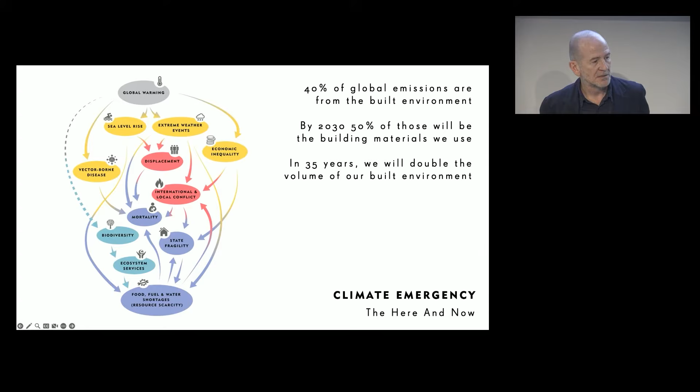And so for us, this is not a Christmas card, by the way. So for us, this is something that we've always really been quite loud and proud about. You know, so we go on marches, we talk about climate change, we engage when we sit down with our clients, when we make competition entries. This is something that we talk about. This is something that we are not embarrassed about.

It's part of the theory of change, that you have to change the conversation, that you have to immediately engage, be loud about these things. This isn't something that we should be kind of quiet about. It's not a way in which we should be approaching this subject. And we know the rules. You know, it's about building less. It's about building light. It's about changing the way in which we see success in architecture. It's about changing the way in which we frame success.

So it's not about the tallest building or about the wackiest shape or the most esoteric kind of argument and position in architecture. It's actually about an architecture that makes a difference, an architecture that is part of that change and begins to think about its position in society and as a profession and as a subject and as a practice. And for us, that really works in our practice as three pillars.

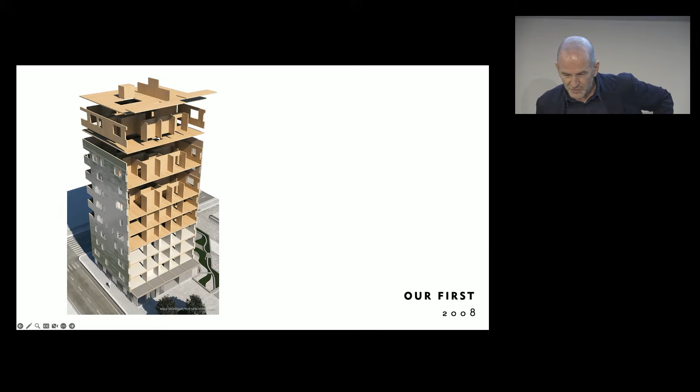And then the more that we understood about this material, the more we understood that this could be a viable replacement for concrete and steel, that this could be something that we could think about in terms of urban housing that could replace these incredibly polluting practices. And so in 2008, after a few years of trying, we built our first tall timber building, which is Murray Grove, 9 stories.

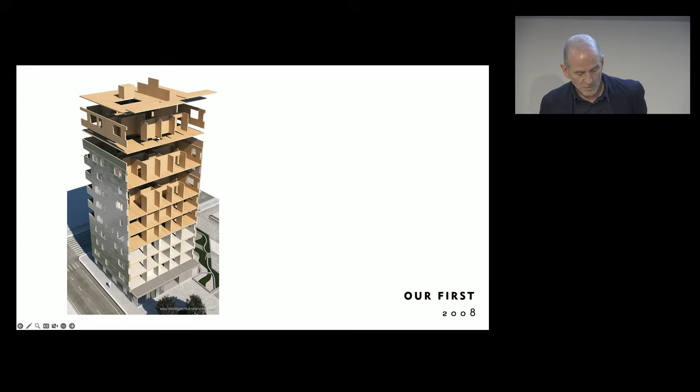I walk past it every Saturday morning on the way to my daughter's swimming lessons, so I can vouch for the fact that it's still there personally. And it's 29 apartments. It took 4 people 27 days to build. It saves over 1,000 tons of carbon dioxide from building, stored within the timber itself.

So I'll get on to talk about trees a little bit more, but as we all know, as a tree grows, as a tree flourishes, it soaks up carbon dioxide from the atmosphere. It releases oxygen back into the atmosphere for us all to breathe and stores that carbon within the trunk of the tree. So a typical European spruce will be just over half carbon, solid carbon. So they are a solid carbon store. So we take these trees and we put them in our buildings.

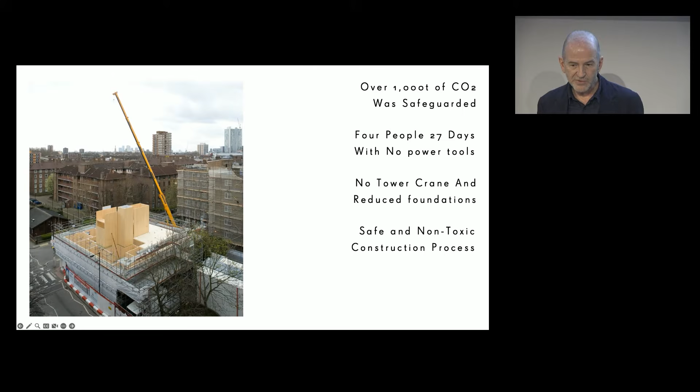We plant more trees in the place of the trees that we cut down, and then these trees become carbon stores. So this was the idea behind this practice. Not only is it a carbon store, but it's a low carbon form of construction. It's a lightweight material, one that you can prefabricate incredibly accurately, so plus or minus just a couple of millimeters when you put it up.

This first tall building, at the time there was really only just a standard type of CLT, 5-ply CLT like this, and we put the building together with 75 mil shelf brackets and 100 mil screws. And you can see it's very simple the way it went together, almost like a cardboard model. It's probably got about twice as much timber in it as it needs to have, is the truth of it. But at the time, nobody had done a building this tall, and so we threw caution at the process.

But also we learned lots of other things. When you change the material that you build in, lots of other unforeseen things change as well. I remember vividly the electrician walking around the project on stilts, so that they can fasten the electrics up into the ceiling. He told me that when you're an apprentice electrician in the UK, you spend about the first 18 months of your apprenticeship hammer drilling into concrete. And after about 18 months, your shoulder joint disintegrates, and then they teach you about electrics.

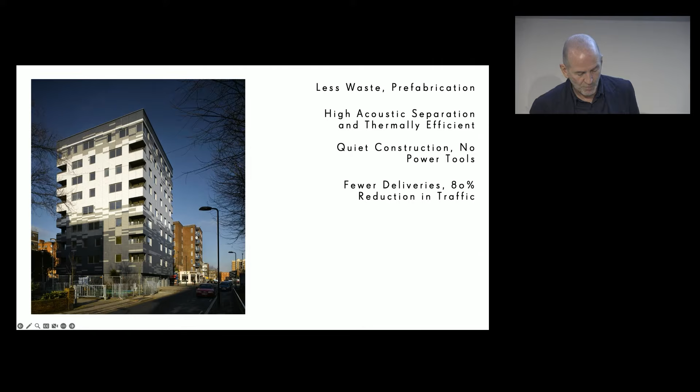They finished the job in half the time that they were programmed to do, because they walked around with their stilts and cordless screwdrivers. The whole thing was finished so fast. So as I said, 27 days, 4 people built the building. Very, very quiet construction, because no hammers, no grinders, no cement mixers, no toxic dust anywhere. Maybe 1 or 2 splinters and a cordless screwdriver. So incredibly fast, incredibly quiet, very little waste.

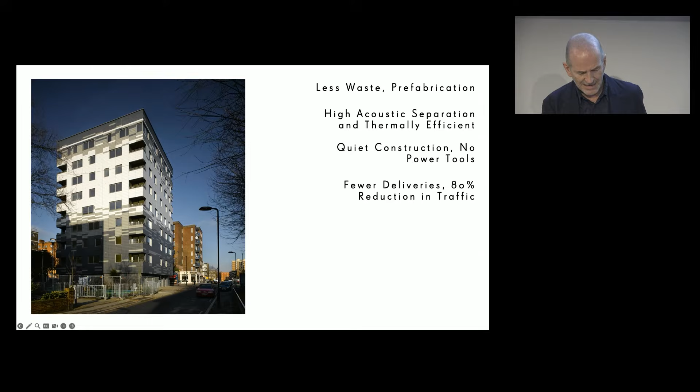And when you think in London that about 60% of our waste that we send to landfill is from construction, the idea that we sent no waste from this building to landfill because of its accuracy is incredible. And far fewer deliveries as well, so none of these big trucks thundering through the streets of London carrying construction components, because it's all prefabricated and lightweight.

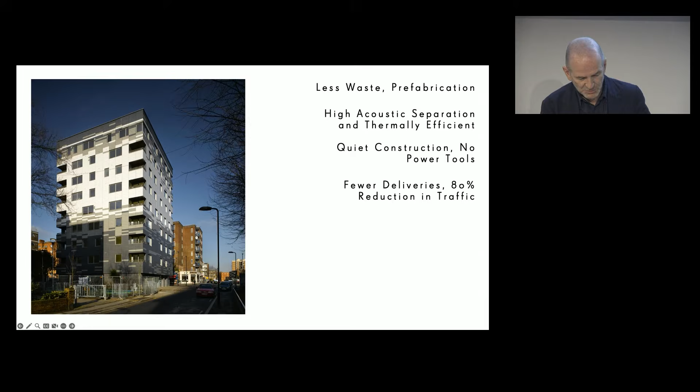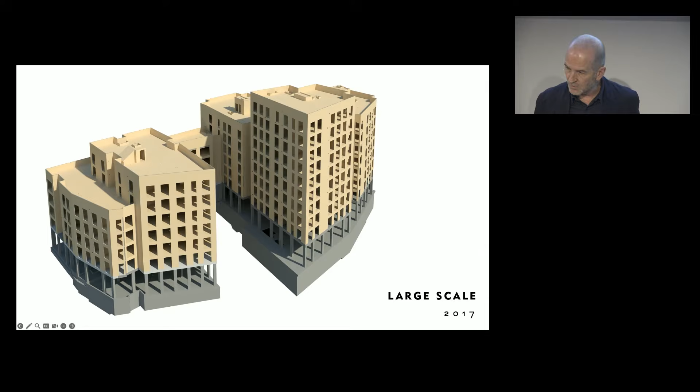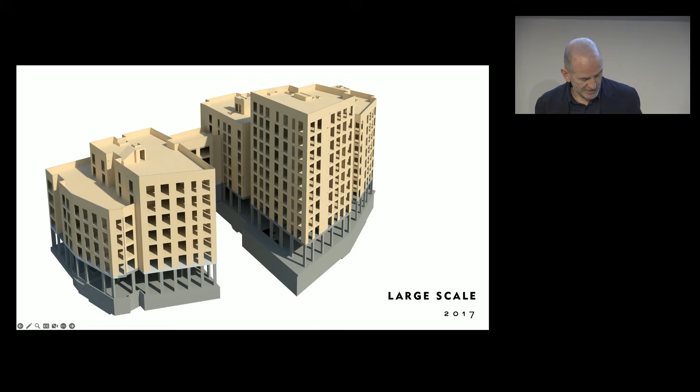Following that building, we built a number of other fairly small projects. This one in 2017 was a larger scale one. It's about 22,000 square meters, 125 apartments, and 4,000 square meters of commercial. A big building for us, 10 stories tall. And you can see here, completely clad in brick, holding these balconies.

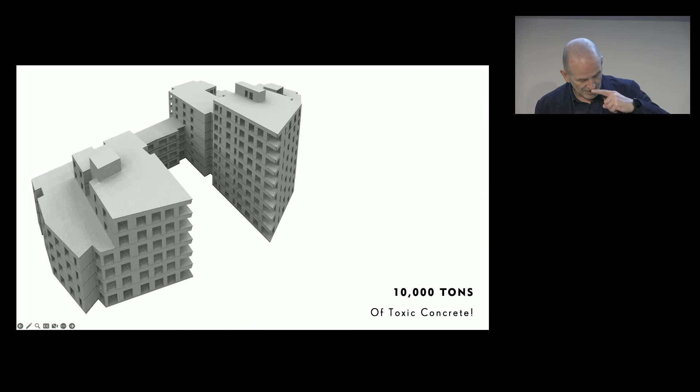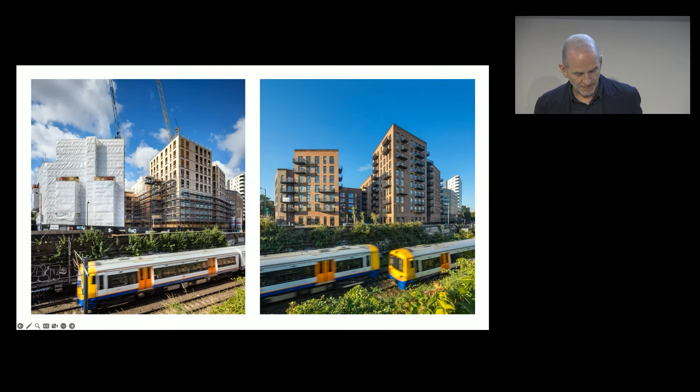In concrete, it would have weighed 10,000 tons. There would have been over 1,000 concrete trucks coming to site, one after another, month upon month. And yet in timber it was less than 2,000 tons. And we built the entire structure in 5 months. In fact, you can see how fast it was, because by the time the train's gone past, the building's finished.

And we don't only build in timber, we also look to other low carbon materials, other bio-based materials. This is a project that we did in 2017 as well, which is a cemetery for the Jewish Orthodox community in North London. And this cemetery is made completely from rammed earth.

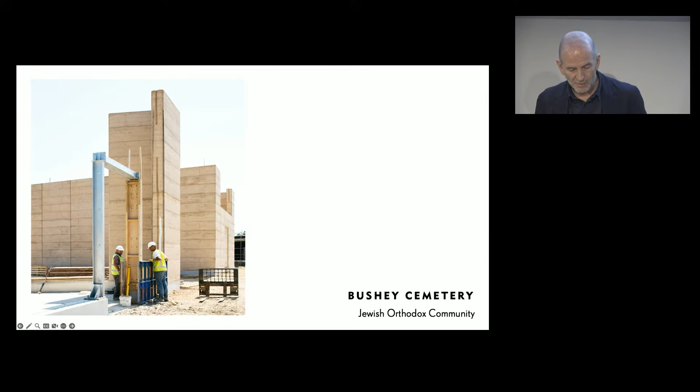Part of the whole Jewish burial process is very much engaged with the soil of the site. When you lay a coffin in the ground, the relatives or loved ones of the person who's deceased will actually pick up soil in their hands or with a spade and lay soil back on top of the coffin. So the idea that we produced a set of buildings which came from the soil around them was seen to be an incredibly fitting way of doing it.

When I first went to the site, you saw that the site falls about 8 meters from one side to another, which, when it was planted with cabbages, was absolutely not a problem at all. But as soon as you have the potential of filling the whole site with dead bodies, then that water runoff becomes a lot more important.

And so we had to move a lot of the soil from one side of the site in order to help flatten the site. And I just had this picture of this soil being trucked out, truck after truck after truck of soil. And then the idea from that emerged that we could actually build these buildings from the soil

of the site. And so there was something about the idea that you're using a Middle Eastern technology with a British soil that seemed to be particularly fitting for this community, that this relationship through the process with the soil, with the earth as well, was incredibly important. And so you can see here that the buildings seem to almost emerge from the soil around them.

And then each one of the panels in the wall, each one of the casting panels here, they're all exactly the same. And the process for making each one of those is exactly the same. And yet each one of them is completely different.

And the idea that when you stand in a funeral hall, when you're at somebody's funeral, I think that most of us have at least two emotions. And one of them is obviously sorrow and loss, grief for the person that's departed, but also there's a feeling about our own mortality.

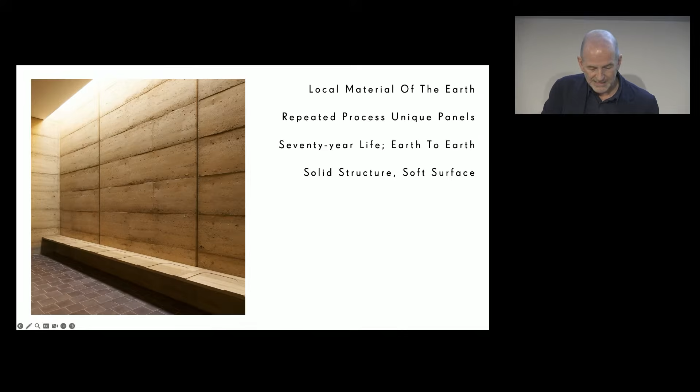So we applied the same idea to the floor, they're all encaustic tiles. We applied the same to the lighting, which is all hand-blown glass lights. And then the idea that you have this natural material throughout. So we have a timber ceiling, so you can see the timber in the soffit.

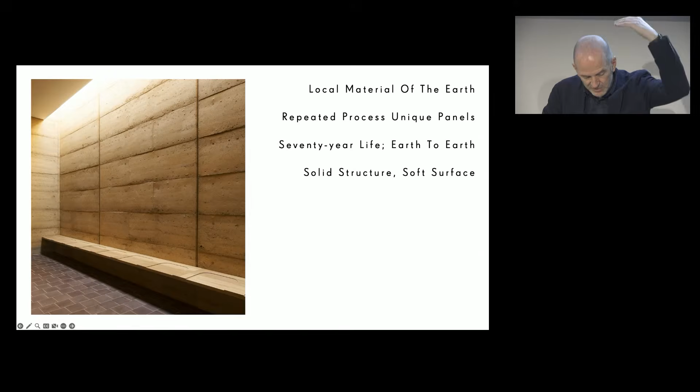We have timber benches that surround the area on the outside wall for the elderly to sit on. So that you get that feeling of material, of warmth, of difference, of patina throughout the building. You can see that now. There is what it looks like now.

And so in 2018, we did this project with Vitsoe, who are a shelving manufacturer. This is in Leamington Spa, in the Midlands. And the brief for this factory was really challenging. I don't know if you're familiar, this is a shelving system designed by Dieter Rams.

And the idea of the shelving is that it's a component system. You have two parallel rails, and within those rails you can fit different components. So shelves, cupboards, drawers, and you can take them away when you move house. You can reconfigure that shelving as your life changes.

And so the idea is that this is a sustainable, long-lasting, repairable, replaceable, reusable piece of furniture that you live with. And the idea was that this building would have some of those properties, that that character would be taken through to the construction.

And so we designed with Vitsoe this frame system that you can see on the left-hand side of the image, and that frame is made from LVL. So rather than the CLT, the cross-laminated timber that we were working with on previous projects, which is made from softwood, this is LVL, which is made from a veneer, like plywood.

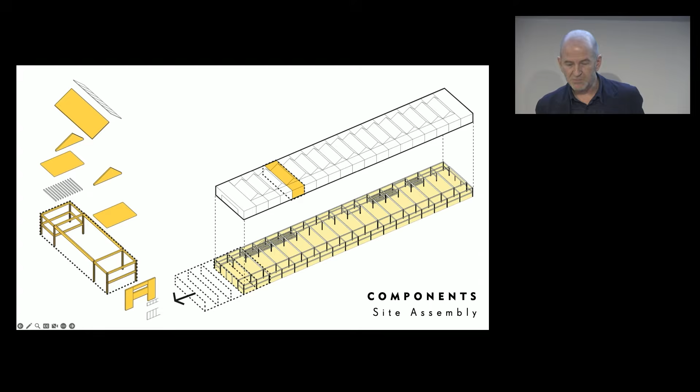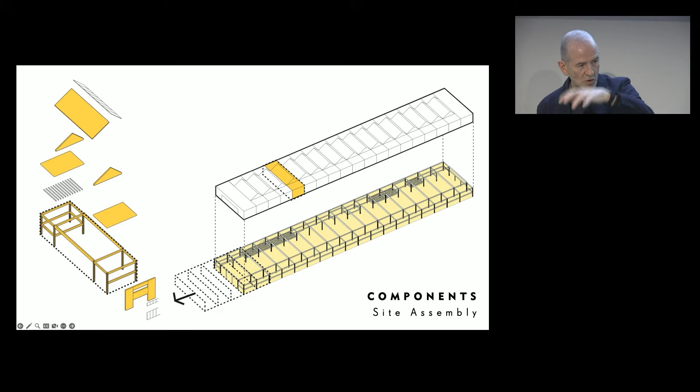And this is made from hardwood, beech, which is the second most farmed tree in Europe, previously planted for furniture and now not used that much for furniture. And so this is a product from that, which is incredibly hard, incredibly tough under compression, about 2.5 times stronger than concrete under compression. So a very strong material that can span long distances as well.

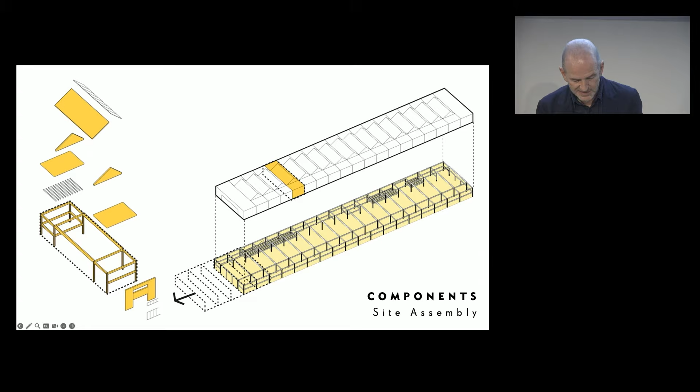So this frame is held in place by the outside wall, by the CLT that surrounds the building. So we have this exoskeleton, if you like, this hard shell that surrounds this frame and holds it up.

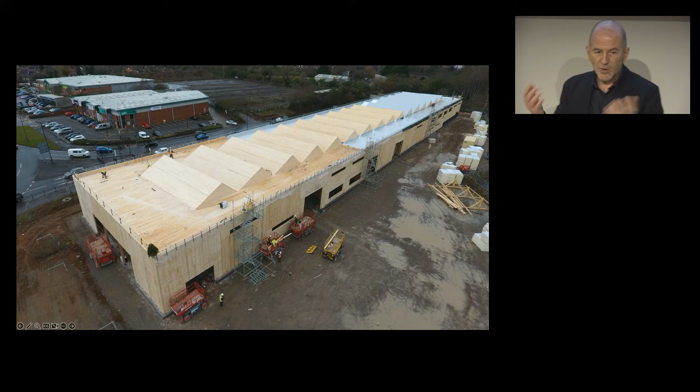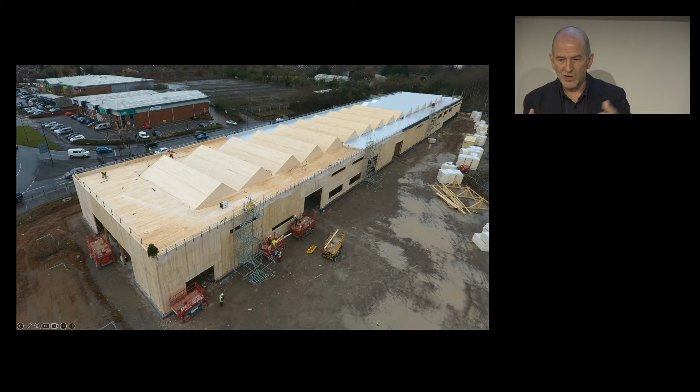So when you design in concrete, a concrete building is all about holding a heavy thing up in the air. And a timber building is really very different, because a timber structure weighs about 20% of a concrete structure.

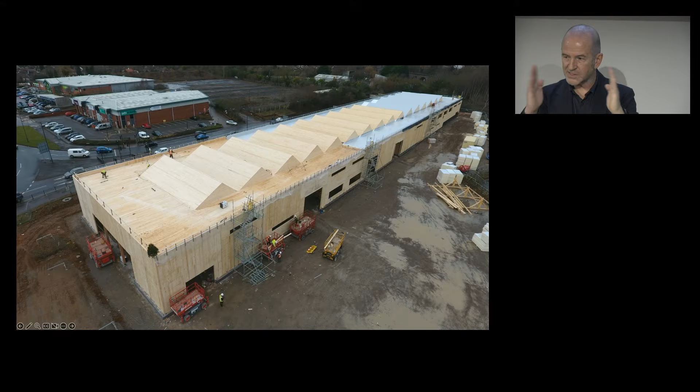So when you're designing a timber structure, you're not thinking so much about how you hold it up in the air, but more about the lateral forces against it. So what we did with this lightweight frame is then we braced that with this external shell. And you can see the light coming in from the north light windows there. You can see inside here the exposed timber in the building and the natural daylight coming through the windows, which just creates this incredibly rich and beautiful space.

And I think from this building, not only was there this understanding or evolution of this notion of the component-based system of design, but also an understanding that natural materials, that natural light coming into a building produce a very different type of architecture, a very different type of space.

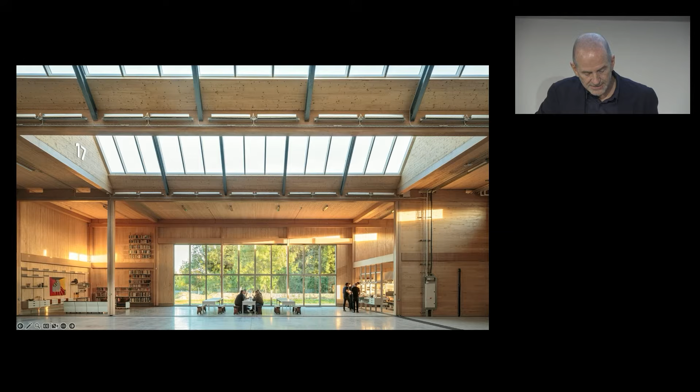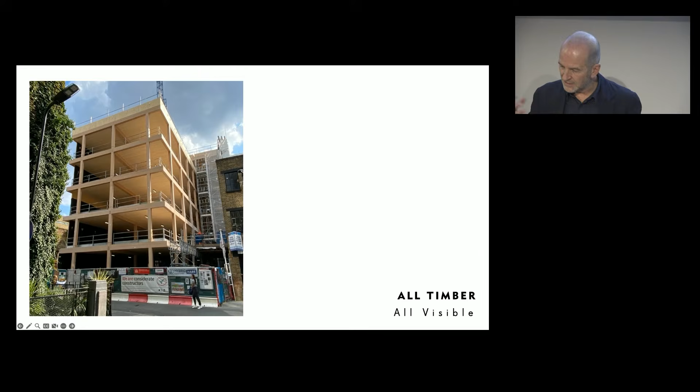And we took those ideas and really employed those in this building, the Black and White Building in Shoreditch, which is an office building which we completed in 2022. It's an office building designed specifically for co-working, for The Office Group, so like a kind of WeWork, but much more beautiful. And the entire building from the ground floor slab up is made of timber. So timber beams and columns, timber floor slabs, walls, lift shafts, staircase, core, everything in the building made of timber, and all visible.

And it was a tough construction. We filled out the whole site, so we couldn't build really from either side. So the truck arrived on the pavement outside, and the crane at the back of the site lifted the pieces of timber onto the site. Each piece of timber arrived with a barcode on it, and we had a person on site with a barcode reader that would be read on the 3D model on an iPad and then put into place. And so a very fast, very efficient process.

In fact, the entire building, the length of the site has about a 15 millimeter tolerance, and across the site about 10 millimeters. So you're working with something incredibly accurate, incredibly precise, a measured, intentional process, which is so different from the kind of concrete plastic architecture that we were used to doing before.

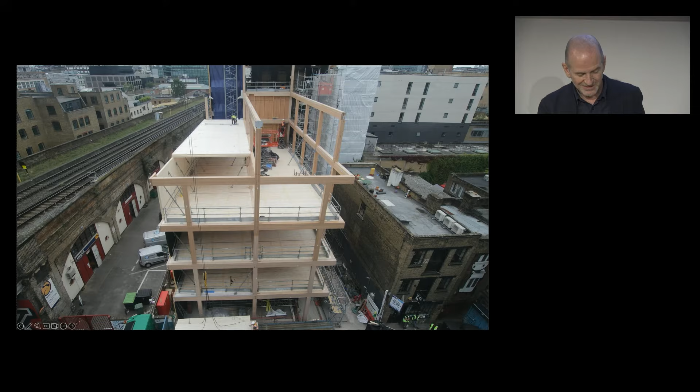So you can see, again, we've got this LVL frame, and we love LVL because it's so strong, it looks gorgeous as well. But also if you imagine when you take a tree trunk, when you cut square things from that tree trunk, you lose a lot of the tree. So you actually use probably about 60% of the tree. But when you have LVL, you put the trunk against a spiralizer, you spin the trunk really fast, and you get 90% of the tree coming out as a veneer. Then you chop the veneer up and stack it up, and that's your column. So there's a real kind of beauty to that as well, that we're really utilizing the material incredibly carefully.

And with this building, we took that same kind of idea of lateral bracing, but rather than having that hard external shell, instead of putting the floor slabs on top of the beams, we laid the floor slabs within the beams, so that the floor slabs themselves give the lateral bracing to the building. So by doing that, we were able to use much more simple connections. We were able to build a building far lighter and with less timber. So we used about 25% less timber by doing that.

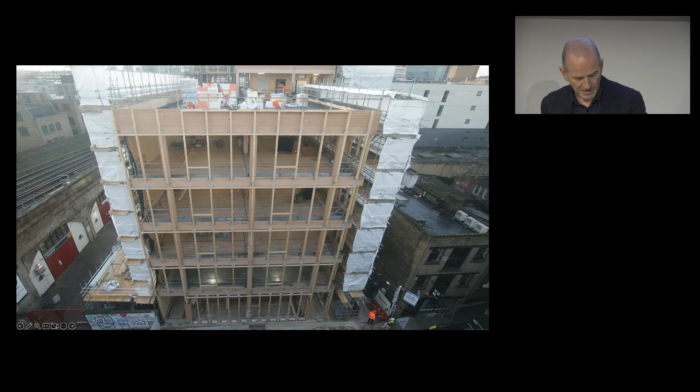As you can see, the building going up here, and then this is the external curtain walling going on, again in timber and glulam. And so on site, we were on site above ground for 14 weeks, 6 people on site, 893 pieces of timber, each one carefully catalogued and put into place.

And before we started the project, we sat down with the site managers, with all the people that hadn't worked in timber before, and talked about why we wanted to build this building like this, why we wanted to build it out of timber, what the differences were. And the kind of conversation that we started in those first meetings went all the way through our time on site. And the enthusiasm, the precision, the care and attention that was put on the site by those contractors, by the people building that building, was incredible.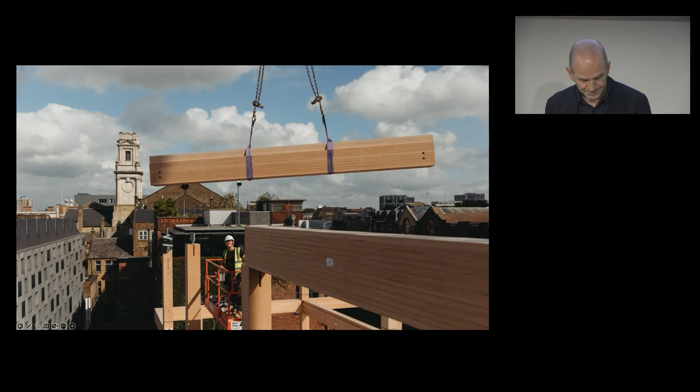So you can see here one of the beams going in with the indentation at the top where the floor slab sits in. And so you can see again with the plan, where the core is in the middle of the building, that the way in which this kind of lateral stability works is for all the floor slabs to track into the central core.

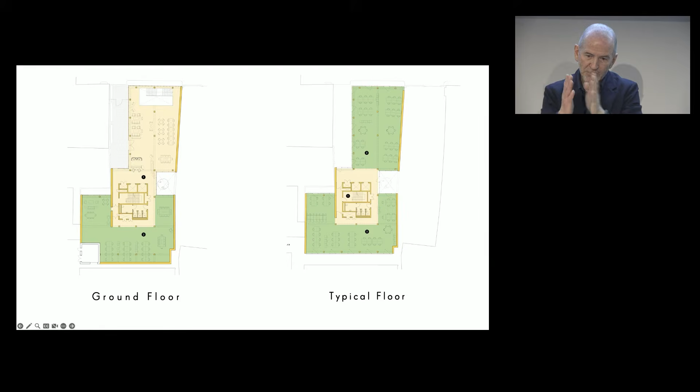That core rises through the building and provides that trunk-like stability through the building. So this is a building that was designed as a timber building. This is a building that was designed through components, through an understanding of what the capacity of the material was, what the advantages of the material are. And so it's designed for that.

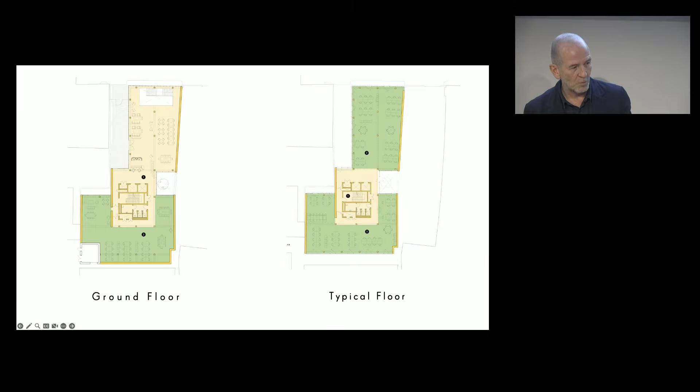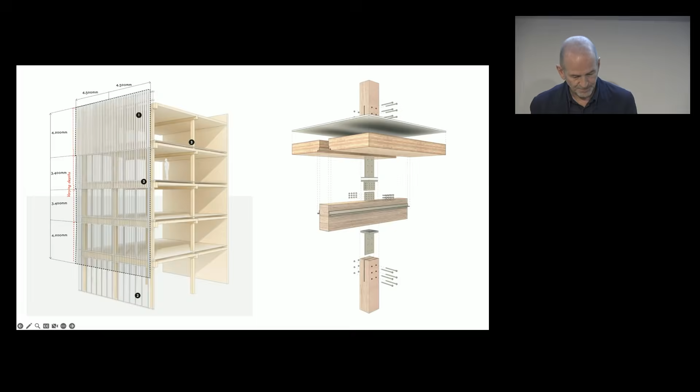So rather than conceiving of a form, which we see so often, I think, in contemporary architecture, and then working out how to build it, this building was conceived as components which we put together to contain a space, to create a space within it. And so here you can see this very simple diagram of how the building went together and how ultimately it could be taken apart.

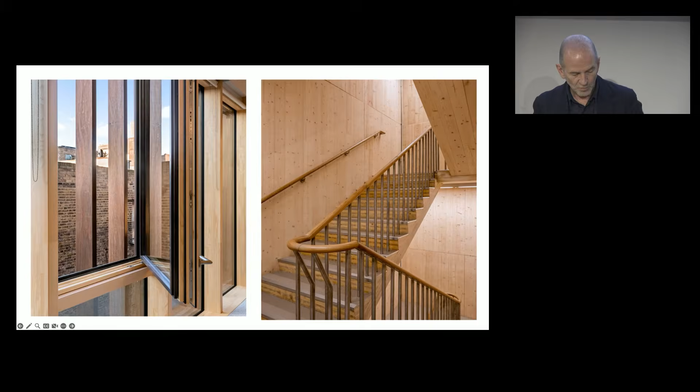And inside are lots of exposed timber, very calm, open spaces. We set the staircase down into the lower ground floor from the front of the building, so the building can sit directly onto the pavement and have that public presence or that civic presence onto the pavement without feeling an imposing force onto the pavement and onto the street. We have opening windows throughout the building, a timber staircase that people love thundering up and down. It's fantastic.

And so this building is a building really of a simple set of clear design principles. It's a building that celebrates its context, but also celebrates and talks about the people that use that building, the people that inhabit it. It's an understanding of the natural materials and how actually they benefit us. Thinking about the finishes of those buildings, thinking about the health, the sanity, the well-being of the people that are in that building. And that this is an architecture where we think really carefully about the design decisions that we make, both in terms of aesthetics, of architecture, of context, but also of material use, of carbon, and think really carefully about,

trying to, as professionals, make those judgments about the amount of material that we're using and what we're using it for. So this produces, I think, an architecture of sufficiency, an architecture where those materials, where that architecture is put together sufficient for its purpose, and part of that purpose being the well-being of the people that live there, that work there, but also the aesthetics and the beauty of that building. So simple finishes, reduced services, all of those things, incredibly important parts of the building.

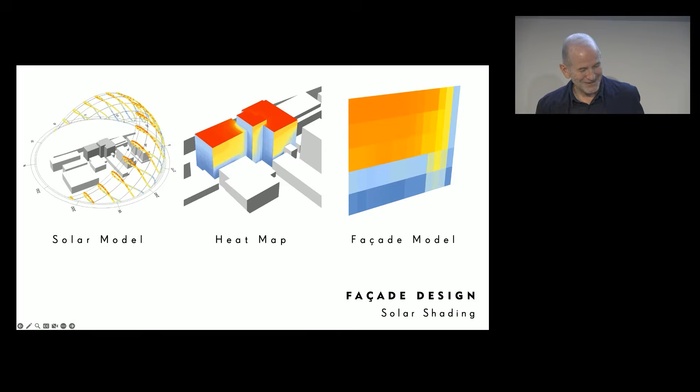And much like some of the work that I saw today, the SED, we also employ software to look at the building, to help us with the design of the building. So in terms of the facade design for this building, we put the 3D model within a solar model. Ladybug. Wasn't me, obviously. So we put it within that.

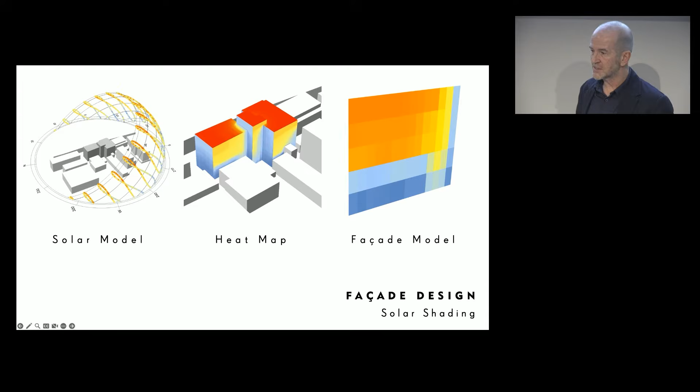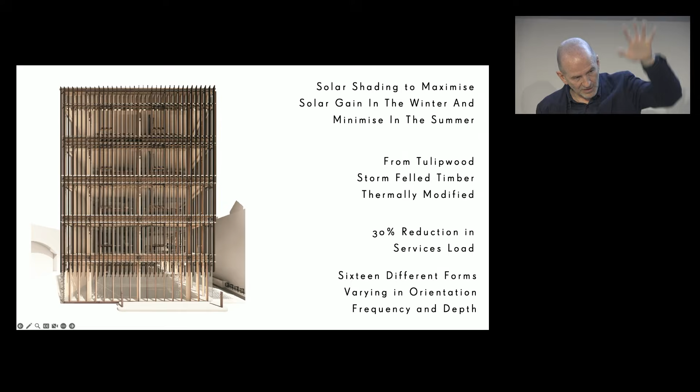We tracked the solar model across the facade to maximize the amount of solar gain in the winter and minimize the solar gain in the summer. And then across that heat map, we then put this solar shading across the building. So to the northwest, it runs vertically, and to the south, it runs horizontally. Across the building, we have 16 different intervals, depths, frequencies, and orientations of solar shading across the building.

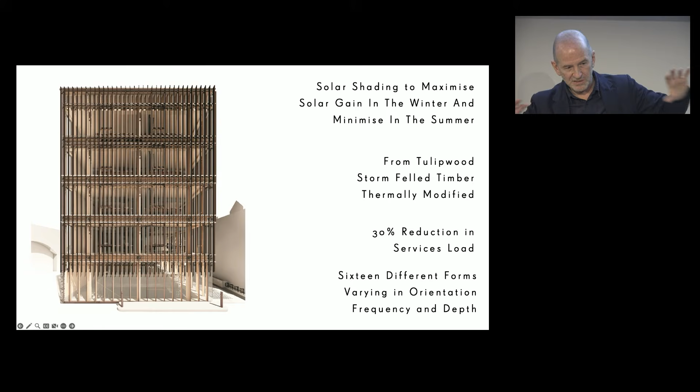And so not only is the orientation of that building mapped out on its facade, but also the adjacent buildings are ghosted onto the facade of the building, as you can see the solar shading changing across the building. And that allows us to have completely clear glass. So the glass on the outside of the building doesn't have any e-coatings baked onto it. It's not reflecting out UV.

It's allowing the full spectrum of daylight to come into the space so that people working in that space are working in a far more domestic feeling environment. You know, it feels much calmer. You're able to sit at the desk in that office space and know what time of year it is outside, understand what time of day it is, understand what the weather is like outside.

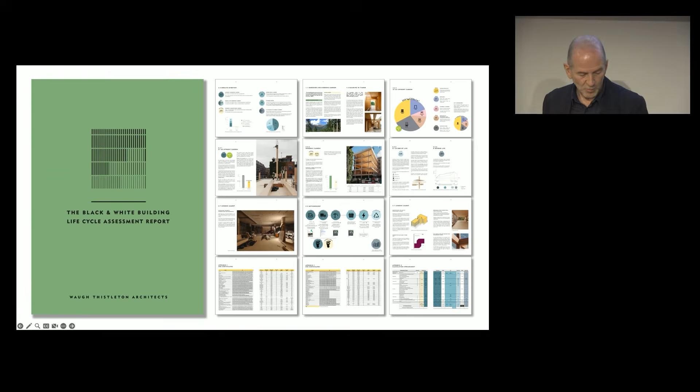And also, this is then glass that can be recycled. So unlike all the big glass office buildings that we see across London, where the glass of those buildings is covered in these e-coatings, which can then never be recycled. And so all of that glass we look at is landfill. And so part of our process on this job, part of the project, was also to assess the life cycle of all the different components of the building.

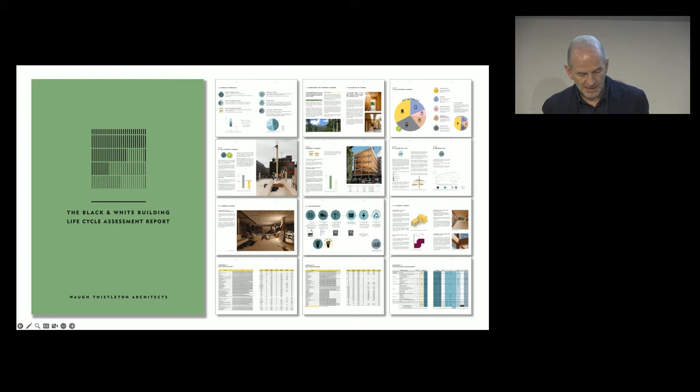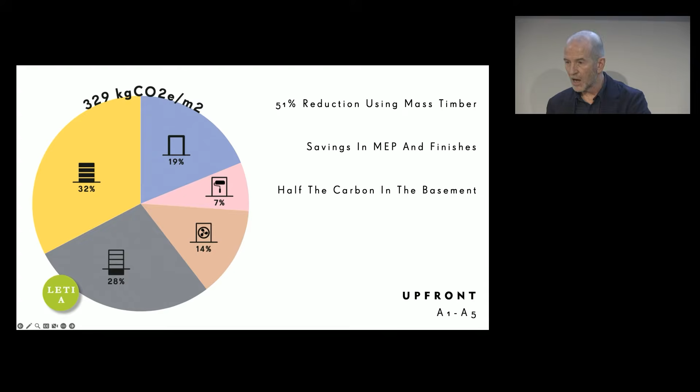So this is something we do as we design, but also something that we do when we finish the building, that we draw up. So this life cycle analysis of the building gives us all the figures and the graphs and the data that one would anticipate from an LCA, but also allows us to track our projections against the building in use.

And so we're able to take those 14,000 odd elements that put the building together, work out what the carbon burden of those was, work out how they perform operationally, and also to think about which ones will have a potential for reuse, how we can take that building to pieces in the future, reuse those components. But essentially, that's a building that has stopped.

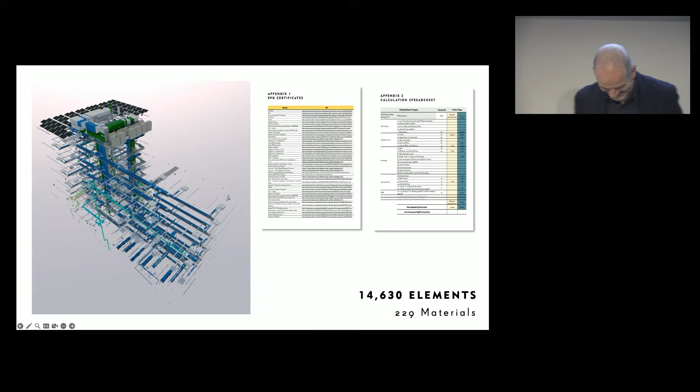Dan? You there, Dan? Oh, there you go. I don't need you.

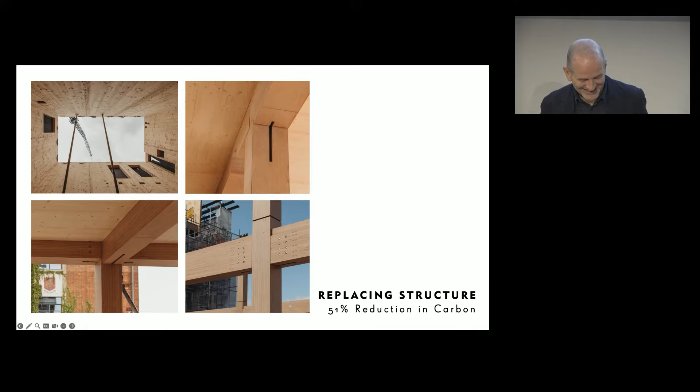But essentially, by replacing the concrete and steel with timber, we're able to reduce the carbon burden of construction in this building by more than half. And actually, a lot of that's just in the basement, the concrete in the basement. So the potential for doing this is massive.

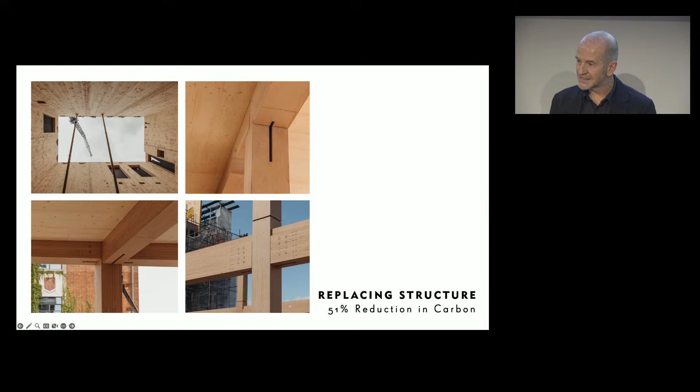If you think about the figures that we were talking about at the beginning of the talk in terms of the carbon burden of construction, the fact that we can halve this using existing technologies, existing know-how, we can immediately halve the carbon burden of construction and design.

So this building also is economically viable within the current context. So this is a building that has been commercially successful. It's fully let. It has a waiting list. It was 2/3 pre-let by the time it was finished. It was on budget. It cost the same as a concrete building, and it was on time and 4 months faster than a concrete building.

So these are the kind of metrics that we take into commercial clients, and we say to them, this is a viable alternative to the heavy carbon construction that you're engaged with at the moment. Now, we did used to do a lot of residential buildings, but post-Grenfell, because of the tragic events there and the understanding of the combustibility of this material, there's a lot of nervousness around building residential buildings in timber.

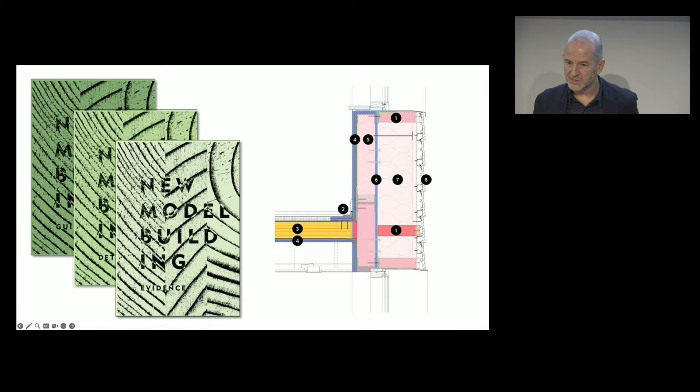So in 2020, we worked with the NHBC, with UK government, with GLA and others, University College London, on producing this series of booklets, a series of guides on how we can build safely within current building regulations in the UK in timber. And again, this was one of those things that started out as a technical exercise and yet turns into an understanding

of how, when you change a construction material, the process of construction, the process of procuring a building is completely different. And we sat down with contractors, with manufacturers, and worked out the process of building these buildings, worked out the way in which these buildings could be put together with ease and with speed.

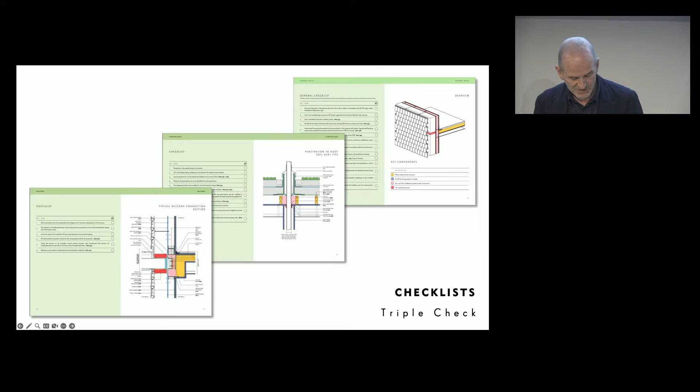And so if you follow us on Instagram, then you'll see these little GIFs that pop up every now and again. So each one of the 50 details that we produced for the building has a little GIF for the contractors to show them how the whole building goes together. And the idea was that these drawings became something that were fluent, that were understandable, that took their lead really from an IKEA catalogue or from a DIY handbook.

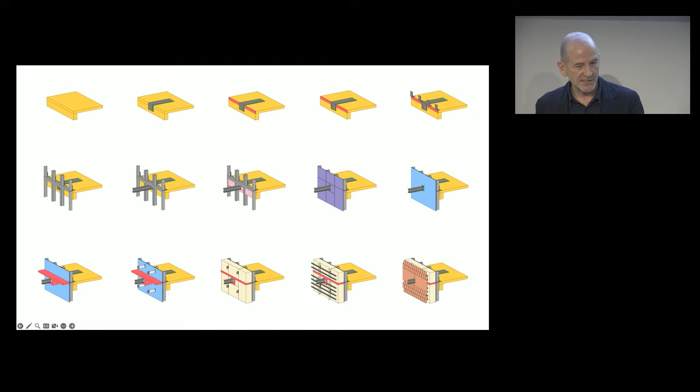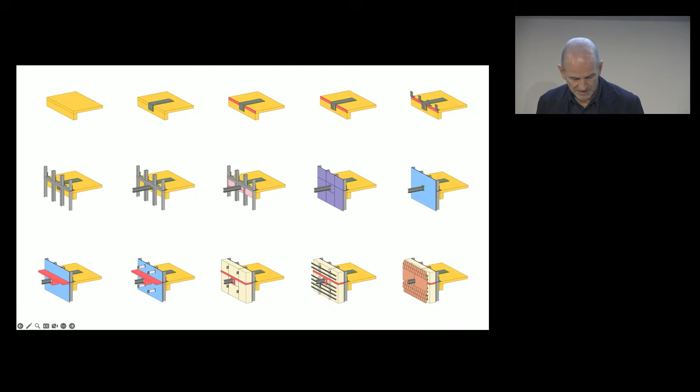These are drawings that are about the message of clarity and simplicity and communication. It's not a communication that's designed to be remote or to disenfranchise people from an understanding of how these buildings go together. And we do work with community organisations.

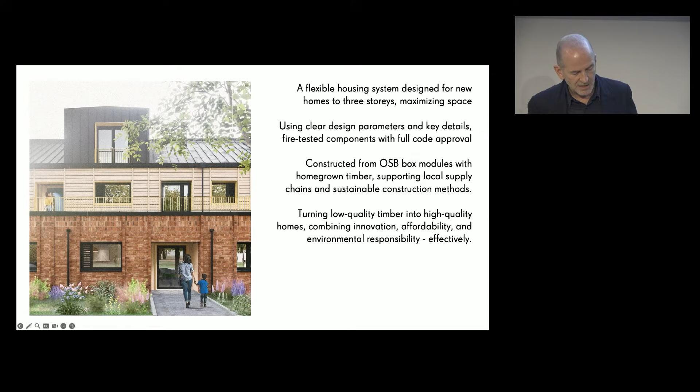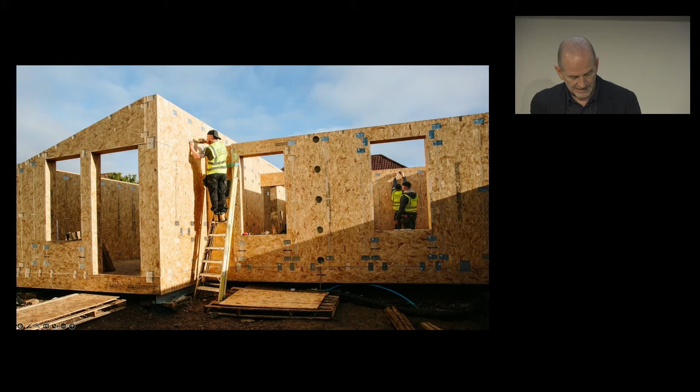This one in Bristol with Multimax, which is a community housing organisation, to look at a system for building low-carbon housing in Bristol, working with community and local council for a system for three-storey housing. And here's one already on site and being constructed both by contractors but also by the people that will live there. And this is typical of the research projects that we do.

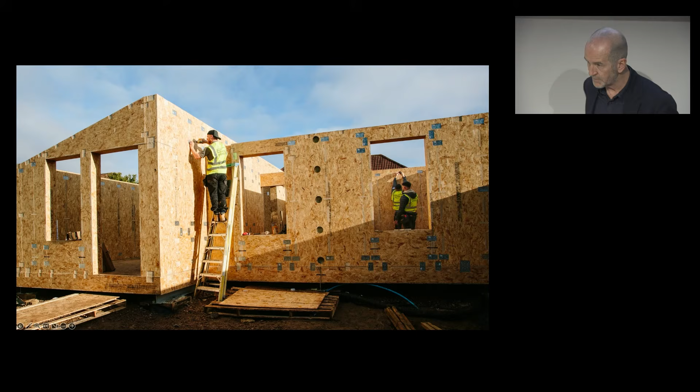We've done a few projects now for the European Union as part of the Horizon program. The one that I'm working on with the team at the moment particularly is the Timber House one, which is a really broad-reaching research project, thinking about timber from first principles. So thinking about this idea of a material that humanity, that all living creatures have lived in symbiosis with since the dawn of time.

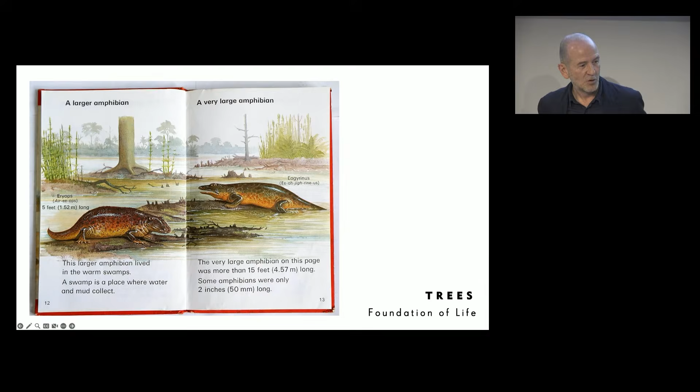This understanding that without trees, fish would never have crawled out of the ocean. We would not be living on this planet as human beings without trees. That this relationship that we have with the tree, with bio-based materials, is something that has been with us since the dawn of time. And so we talk about things like that.

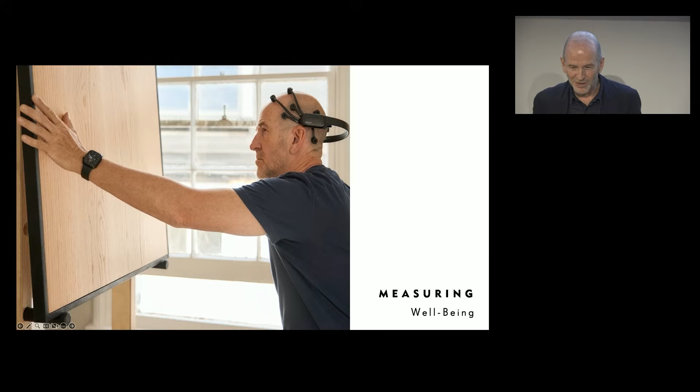We test ourselves. This is me looking at my brainwave patterns when I look at timber. And there you go. Look, hey presto, I really like timber.

Apparently. But it's also this relationship that we've had with natural materials, with natural light, with having plants, with having kind of nature in our buildings. This kind of move that modernism, the evolving modernism in the 1920s and 30s, this notion of science within our buildings took over, was this idea that cleanliness, that sanitation became this vital part of architecture, became a vital kind of proponent of what we should be looking at.

And so you can see that movement, and this is something that we're kind of discussing on a daily basis in the practice at the moment, is this idea of how human shelter has moved from notions of survival to notions of resilience through modernism, what Kenneth Frampton called the bleach-smelling buildings, to a new type of architecture, which is an architecture where people flourish, an architecture that's related to our planet, which is about natural materials, which is about our health and our well-being.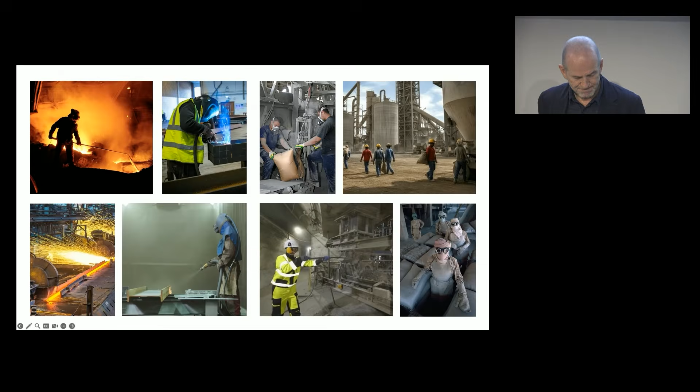And not just of the people that live and work and get better and are educated in those buildings, but also the people that build those buildings. The lack of responsibility of architects for the provenance of their materials or how the buildings that they design are built, I find staggering. Still, modern slavery exists in construction and in the manufacture of construction materials in far greater proportions than any other industry. And yet this is something that architects are sort of so removed from.

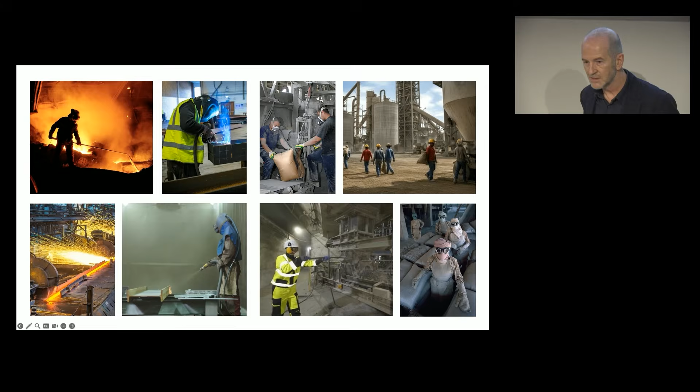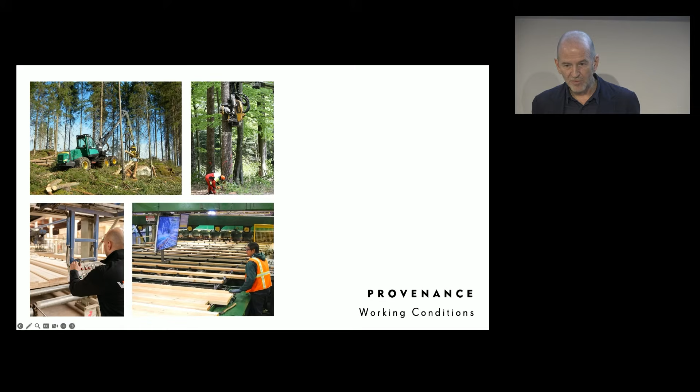This idea of where do our building materials come from? Who makes those materials? And how are they put together on site? What kind of life is that? And the difference between working in concrete and steel and cement and aggregates to working with timber, to working with a bio-based, natural, healthy, precise and prefabricated material. And so this is a building we've got on site at the moment in Milan. It's a very simple building.

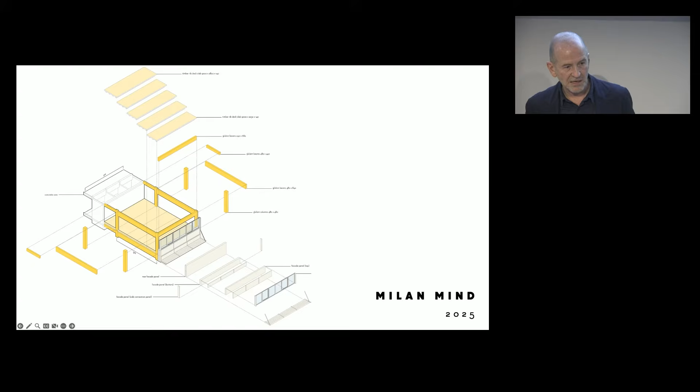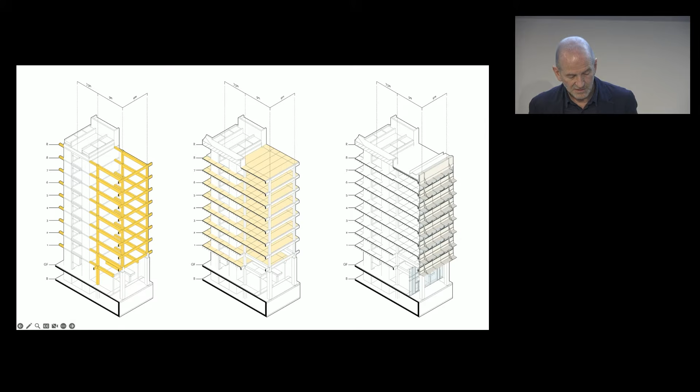It's a building which, again, is a kind of component-based design. So it's based on this 9-meter grid where we design the beams, the columns, the facade is prefabricated, the floor slabs are prefabricated, and the whole building goes together incredibly quickly. So above ground, we're 11 months for 23,000 square meters of building. So very fast. And part of that process is to build these one-to-one models to demonstrate to people how solid, how fantastic and firm and beautiful these buildings are.

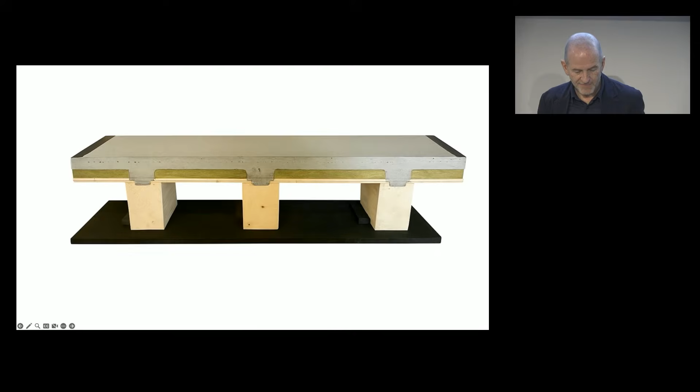We developed this prefabricated floor system where we used a GGBS concrete in order to maintain a very steady floor for a life sciences project and as an acoustic and fire barrier between the floors of this building. And so these are prefabricated off site, 9 meters long by 1.5 meters wide, and lifted up and placed into position. So a very, very fast, effective, and efficient method of construction. You can see here on site a few months ago, in October last year, that's the ceiling going in.

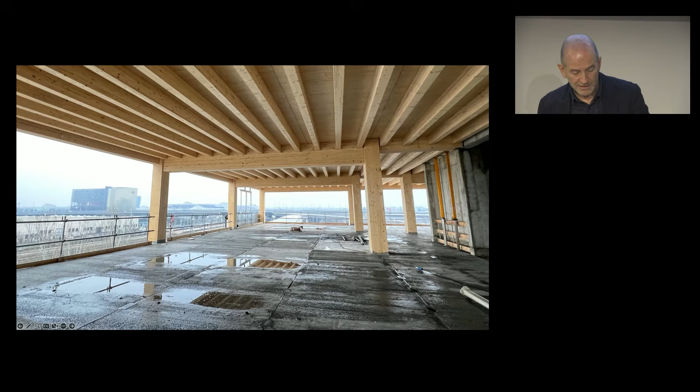So you can imagine this is a type of building to work in. Again, completely clear glazing all around the building. Solar shades here to the south. And as it says on our office T-shirts, we let the wood do the work. So this is about simple buildings. These are about open, clear spaces with natural materials, natural light, and generous space.

And I think that this architecture that we are focused on as a studio, this kind of ethos-based practice that we have, is about sustainability. But it's about sustainability that's not just about metrics. And so I like to encourage you all to understand that actually to build a truly sustainable building is a building that will last, a building that's adaptable, a building that works in its contexts, that works for the people that will live, that will work, that will learn, get better in that building.